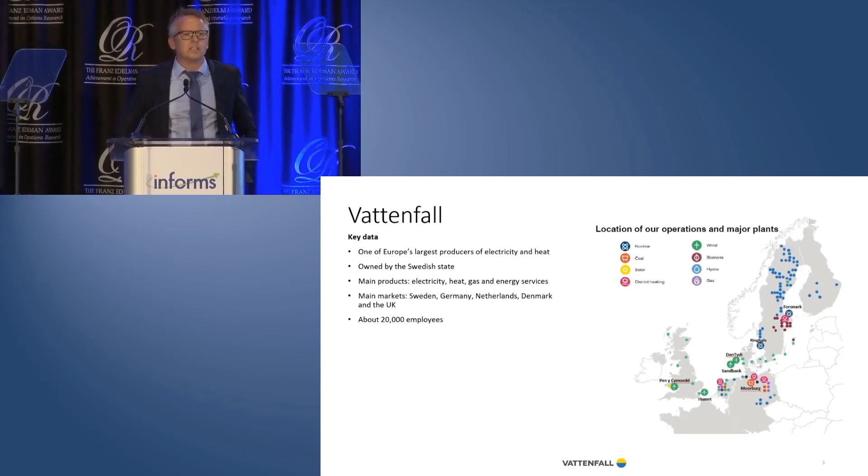Some of you might ask a simple question. Who is Vattenfall? I know you had IBM on before, and even in Europe we would know who those are. But if we look at it, then we are one of the biggest utilities in Europe. We are approximately 20,000 employees. And what we are known for is actually leading the energy transition in Europe.

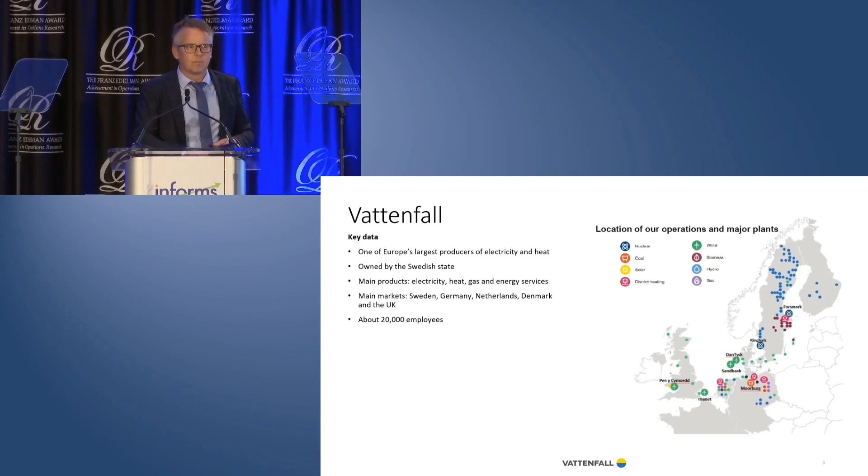So what I'm going to present today is the work which is a combination of 4 years of collaboration with Bologna, with the Technical University of Denmark, and Vattenfall. What I would like to tell you about is what does it mean for us? We are a simple company. We work for fossil-free within a generation.

Fossil-free within a generation means that we are able to keep what we promised in the Paris Treaty, keeping the global warming below 2 degrees. 2 degrees is a huge difference to the world climate. I represent a Scandinavian company. And of course, in a Scandinavian company, it's very easy to argue like that.

What we have achieved over the last 3-4 years is making renewable fully competitive with how a coal plant produces power. That's what this project is all about. I will go into details a bit here on what does it mean with fossil-free living for us as a company.

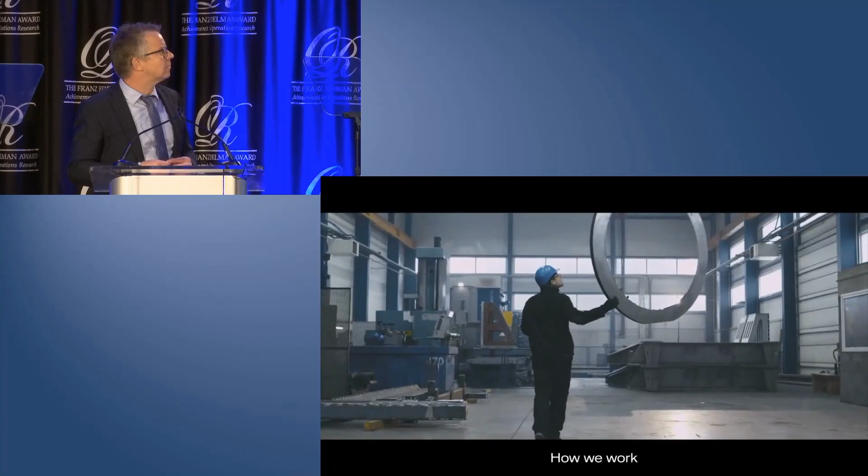Our world urgently needs to change and find alternative ways for cleaner powering and heating. Change has to happen, and fast. At Vattenfall, we believe the solution is energy that is free from fossil fuels. We need to change how we live, how we work, how we produce, how we build, how we travel. At Vattenfall, we're determined to power and lead this change.

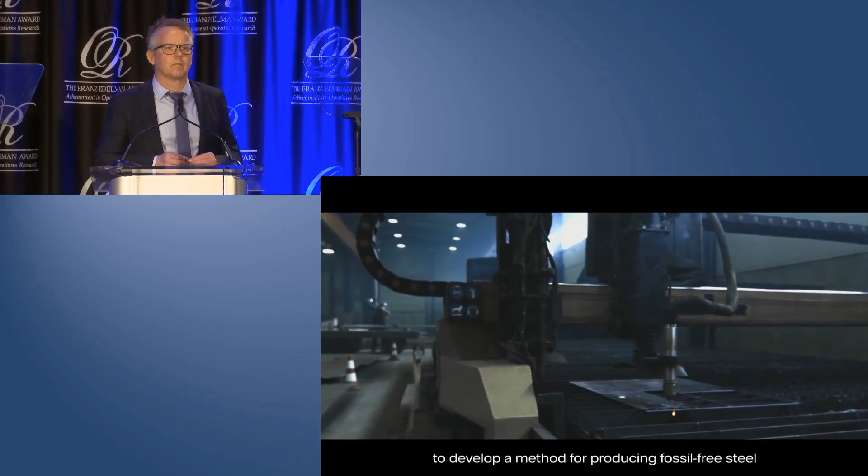We exist to help all our customers live their lives in ever climate smarter ways and enjoy fossil fuel-free lives within 1 generation. As one of Europe's leading energy companies, our ambition is to become fossil-free ourselves. But that's not enough. We also actively seek new partnerships inside and outside the energy industry, searching for new ways to achieve fossil freedom. For instance, we collaborate with the steel industry to develop a method for producing fossil-free steel that emits water instead of carbon dioxide.

We help our customers to adopt smart technologies to create their own electricity or heat in an easy and affordable way. We are building a network of charging stations in Northern Europe, together with our partners, to accelerate the transition to electric cars. Our journey to fossil freedom is actively underway.

What does offshore play in this whole game? We take approximately 2/3 of our investment budget every year to invest in wind. And that is basically the key enabler for actually getting into fossil freedom. But it's a strong competitive market. If we look at the competition we see in Europe, we see it going into US, we see projects in Taiwan. It's a heavy competitive market.

We look at Block Island that gave very high subsidies. If those were the benchmarks of the industry, we would actually never see a transition to renewable energy. So what we have been doing, and that's what we've been using our operational research for, is we have used 6 gigawatt of projects where we have estimated what kind of benefits can we achieve out of that. We have achieved $170 million in real savings on the given projects where we are today.

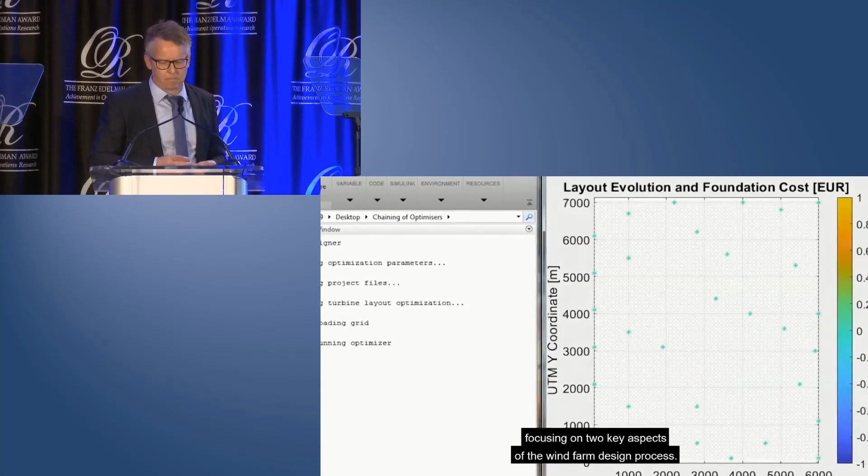That means that only the company with the lowest bid can capitalise on their investment and sell energy in that country for the lifetime of the farm. That means it's essential for companies like Vattenfall to be realistic in these bids and find innovative ways to win the bid while still making a profit. Vattenfall uses operations research to be more competitive in the offshore business, focusing on 2 key aspects of the wind farm design process: turbine allocation and cable routing.

When Vattenfall enters a tender, there is a specific area where turbines can be placed. Based on the demand and on the internal grid capacity, the state also fixes the capacity of the farm. The capacity of a farm is the maximum production that a specific farm can possibly produce. Once the experts in Vattenfall decide which turbine model to use, the limitation translates to a maximum number of turbines that can be located on the site.

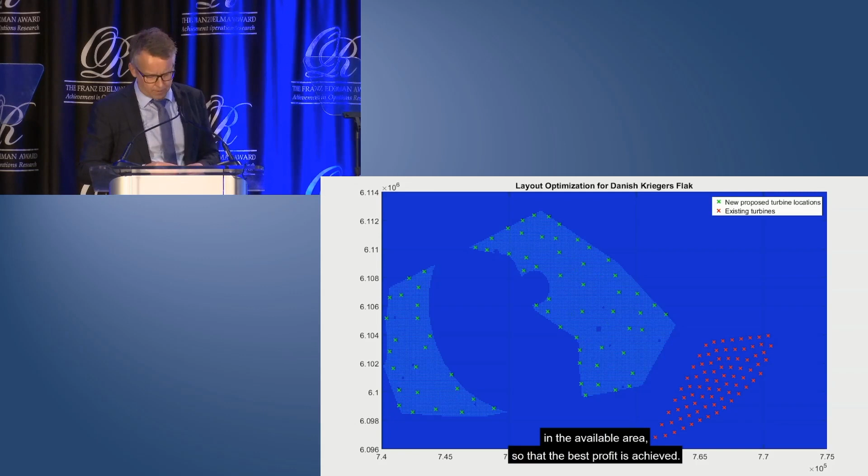The optimiser must decide where to exactly place turbines in the available area so that the best profit is achieved. This means maximising revenues, such as power production, and minimising position-related costs. But how can a higher production be achieved while reducing costs? The key is to consider the variability of the wind in the site and the so-called wake effect. If we can place the same turbines in a different way, so that they cast less shadows on each other, we can achieve higher production without changing our costs.

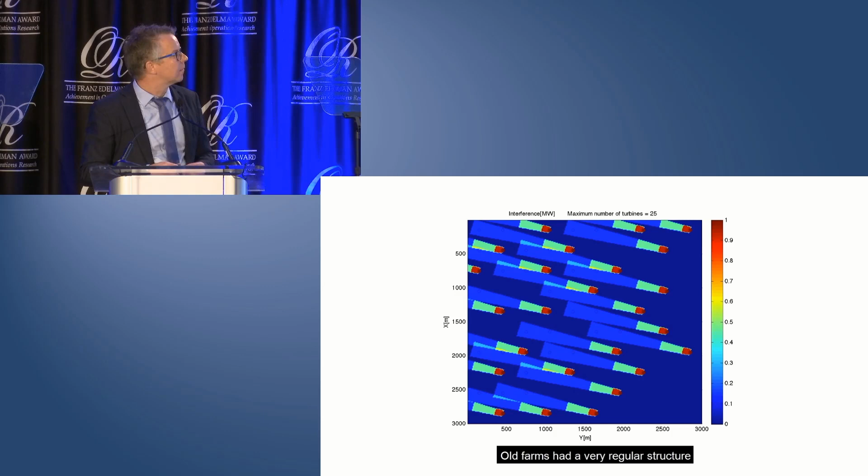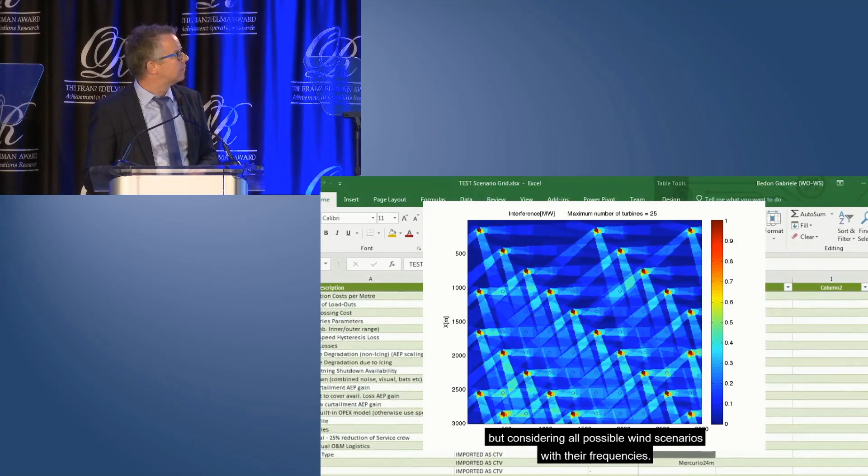Old farms had a very regular structure, with turbines on a regular grid at a fixed distance to one another. Our operations research tools show that these layouts are not optimal and highly affected by the wake effect. As the wind varies greatly over the lifetime of the farm, the optimiser needs to consider the full variability of the wind when deciding the turbine location and computing the revenue losses due to wake effect. So the challenge is to decide the location of turbines, considering not only the wake effect from one direction, but considering all possible wind scenarios with their frequencies. In practical applications, we consider hundreds of thousands of possible wind scenarios for each optimisation.

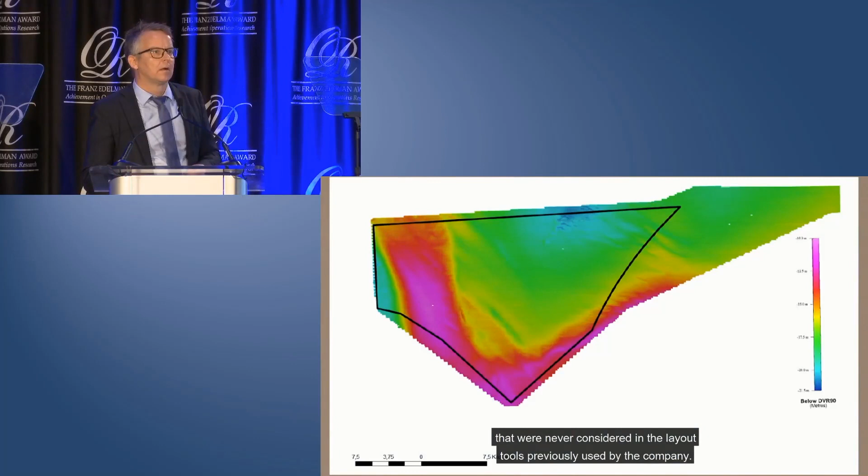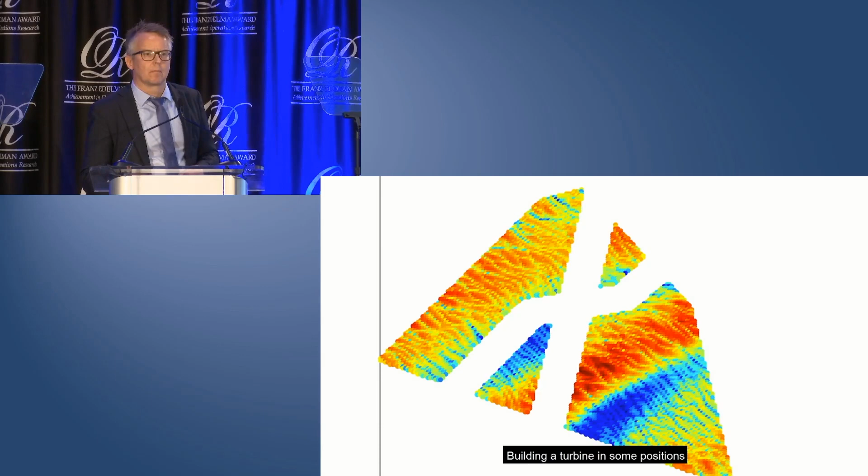And we do even more than increase production. We can also look at reducing costs at the same time. The optimiser can indeed also consider position-specific costs that were never considered in the layout tools previously used by the company. Depending on the water depth and on the soil conditions, different foundations may be needed across the site. Building a turbine in some positions may therefore be more expensive than in others. The optimiser can consider this explicitly and balance out higher production against higher costs.

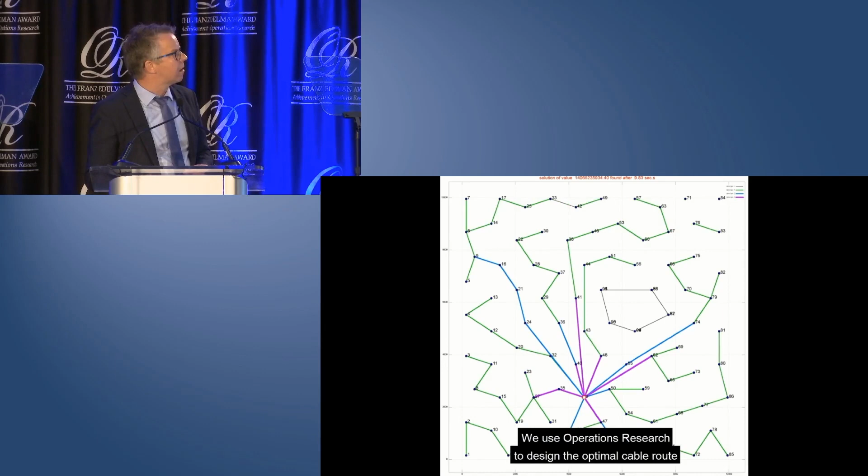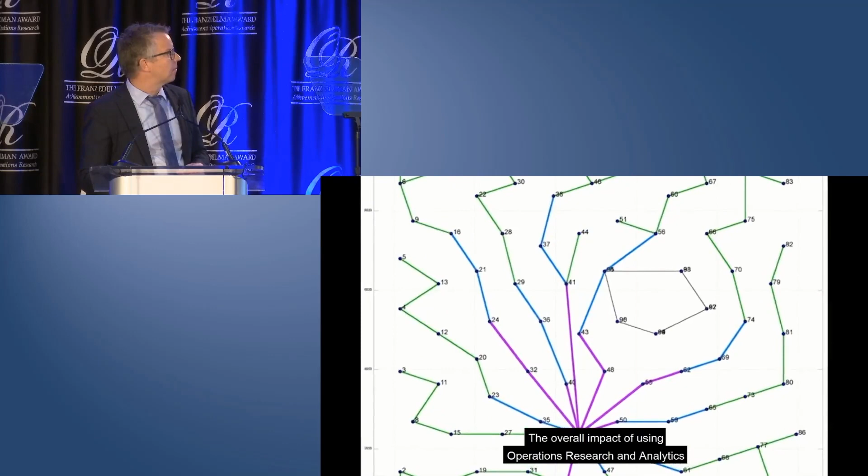We also considered the challenge of optimally connecting all turbines with electrical cables. Different cables with different costs and capacities can be used. We used operations research to design the optimal cable route between the turbines in order to minimise costs. The overall impact of using operations research and analytics in the design of offshore wind farms compared to the old methods to solve the challenge has been estimated to be worth around 10 to 15 million euro for each wind farm. The optimisers also opened the road for digitalisation and more data-driven decisions in the evolution of Vattenfall's wind farms.

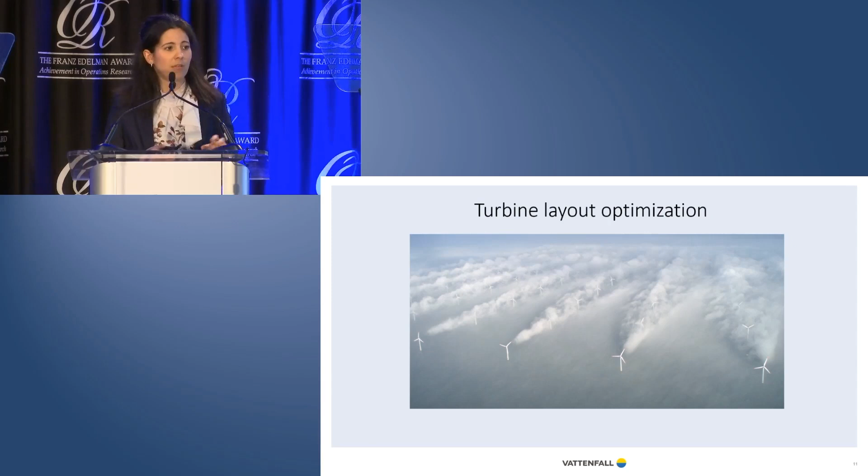So it's extremely important when we optimize the layout of a site to consider this wake effect. So to be more specific, when we enter a tender, Vattenfall is given a specific area. There is also a maximum capacity of this area, so a maximum production that this farm can produce, and this translates in the maximum number of turbines that we can place in the site. So the optimization question is how to locate these turbines in order to maximize Vattenfall profits.

So the main part of the profit is related with revenues. So how can we locate turbines so that the overall farm can produce more? So reducing this wake effect I talked about. But another key point of this is also reducing our costs. Because in specific sites, in complex sites, the soil condition may be very different in the area, and also the water depth may be very different in the area. So the result is that we need specific foundation types for each possible position, meaning that some positions may be more expensive than other positions.

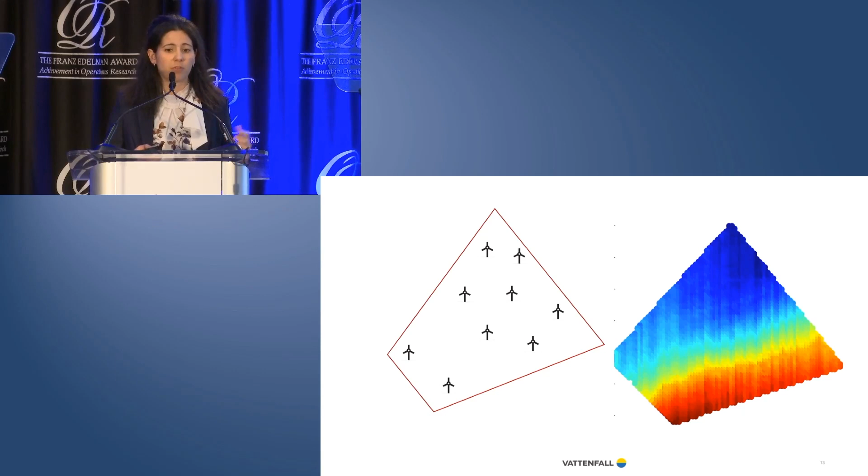For the first time, we have been able to consider this in the optimization using operation research so that our tools can balance between a possible higher revenue because of higher production and possible higher costs for position-related costs. So we quickly realized that this problem is a location problem that can be formalized in a mathematical way. So what we did is we take all the available area and we discretize it in a number of possible positions. For each position, we have a binary variable that represents if we locate a turbine in that position or not.

So we realized that we can formalize the problem as a mathematical model. And to answer the needs of the company, we developed an original mathematical model that captures all I've told you before in the previous slides. What is very interesting from this model, compared with the models existing in the literature, is that we could solve bigger instances. So models from the literature can solve until 100 possible positions, while this model can solve until 1,000 possible positions. Another interesting point of this model is that we can easily consider the stochasticity, so having a stochastic programming variant of the previous model.

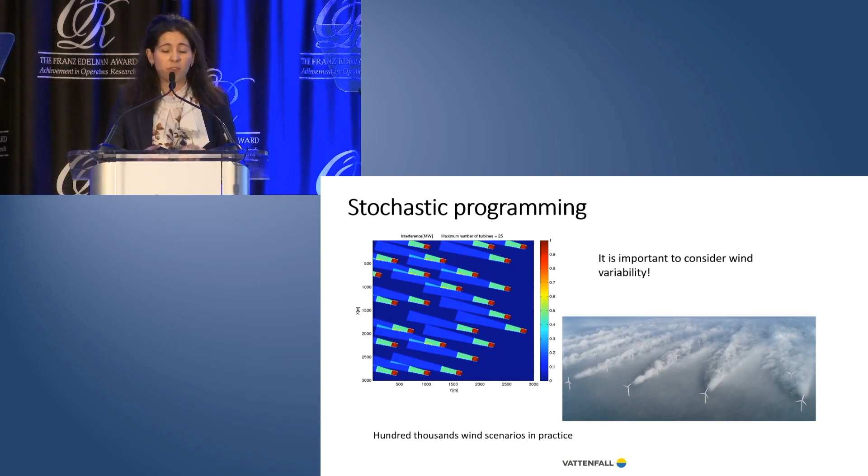Indeed, we now know that it's very important to consider the variability of the wind. In common wisdom, so with old parks, we were mainly focusing on the main direction of the wind. So when we locate turbines on a regular grid, normally we space the turbines more on the main direction. But now, thanks to operation research, we can actually consider the full complexity of this, and we understood that it's not enough to consider only one wind direction, because in that case, we risk the wake effect we have in this picture, for example. So it's very important to consider the full variability of the wind, and in practical application, we receive hundreds of thousands of possible wind scenarios for each optimization. So this is a big advantage of the model we developed.

But when we went to reality, so when we asked the company, okay, let's start to do it for real, we realized that reality was more complex than what we were studying in the research part of the project. Indeed, we were given instances of more than 20,000 possible positions. So we realized that the model we developed wasn't enough, and we had to look for innovative solutions to solve these way more complex problems.

And what we did is that we used a new framework developed in the operation research literature called matheuristic, where the main idea is to mix the strengths of the mathematical modeling, math, and the strengths of the heuristics approach, heuristic. So just to give you an overview, we have a kind of heuristic where we look in the neighborhood of the best solution we have so far, using the MILP solver as a black box. So this innovative solution was actually very good in practice.

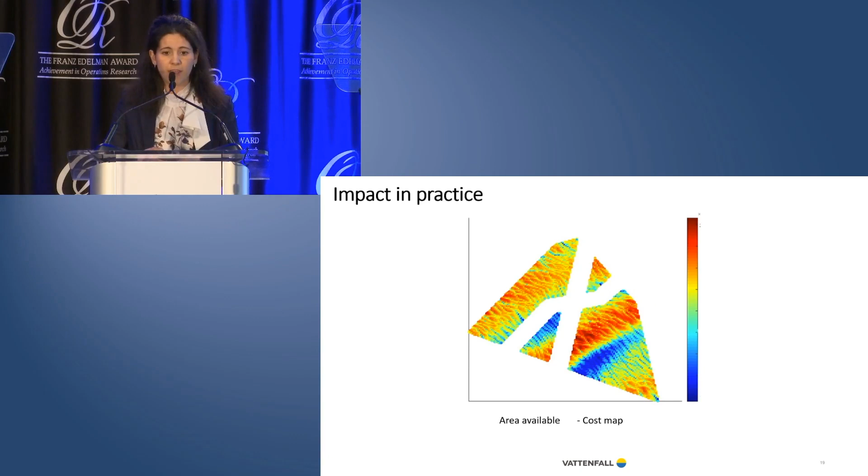So to understand what was the impact of using our technique, we compared it with the classical method that was used in Vattenfall to solve this problem. So the classical method in Vattenfall was to use some commercial software existing on the market. The problem with this commercial software is that they cannot consider explicitly the cost part, but they are only maximizing the power production. So what they were doing was to optimize based on power production and then manually move the turbines that were in the most expensive positions.

This site I'm showing here is actually a very important site for us. It's called Hollandse Kust Zuid, and it's going to be the first site to be built subsidy-free. And this is a site that Vattenfall won in the last years. So again, we compared our result with the result using the classical methods, and in this specific site, the savings were about $11.5 million.